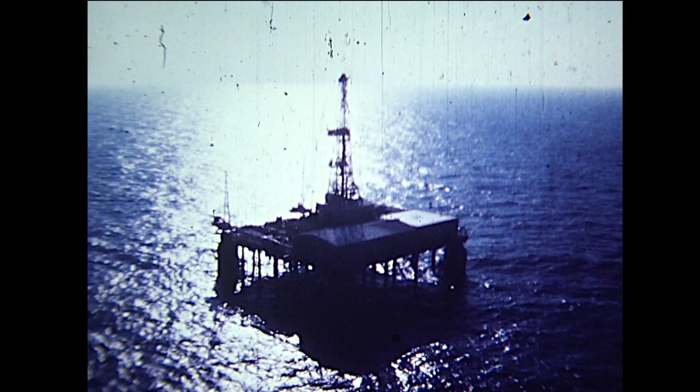As Union Oil began to acquire offshore leases in deeper waters, the question arose, how will we produce them? One of the answers was with subsea completions, Christmas trees on the ocean floor. But Union didn't have a subsea completion anywhere in the world, so management decided before venturing into deep waters, deep water meaning below the effective working depth of divers, to install a deep water system in an existing field. That way, Union could develop the needed expertise and define the production characteristics of such wells.

The Gulf of Mexico was selected for installation because of Union's vast offshore drilling and production experience there. During the summer of 1974, a state-of-the-art study was conducted of the systems then available. The study showed there were 5 manufacturers with functional systems. There were 2 types of subsea trees available, wet and dry. The wet tree is exposed to the marine environment. The dry is enclosed in a 1-atmosphere air environment chamber, which permits access by workers in shirt sleeves. All 5 manufacturers submitted proposals.

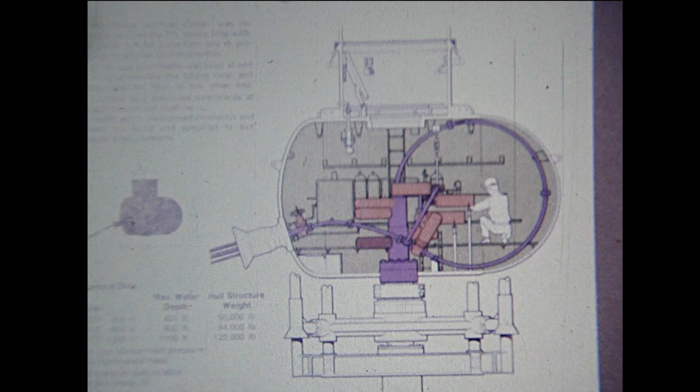The Lockheed Petroleum Services dry system, designed for use in up to 800 feet of water and 1,200 feet with slight modifications, was accepted because it had the best method of connecting flow lines to the well. The connection of horizontal flow lines to the well on the ocean floor in other systems is very difficult without the help of divers. The Lockheed method doesn't require divers for flow line connections.

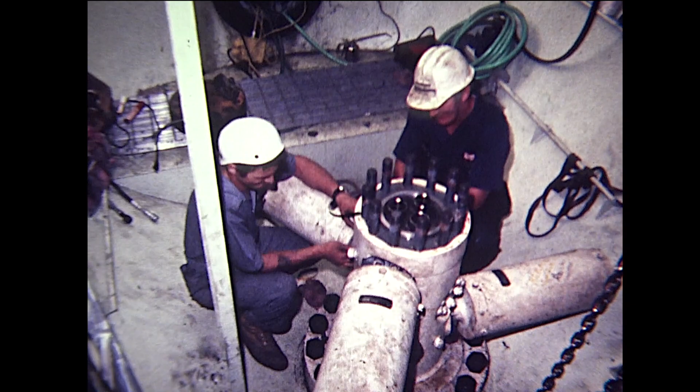Other advantages of the dry system are that vendors can work on their own equipment as they would on land or a production platform, that it protects the electrical and hydraulic equipment from the sea, and that it provides more space to reduce equipment congestion. The main disadvantage is a dependency on a support system for access to the subsea wellhead cellar.

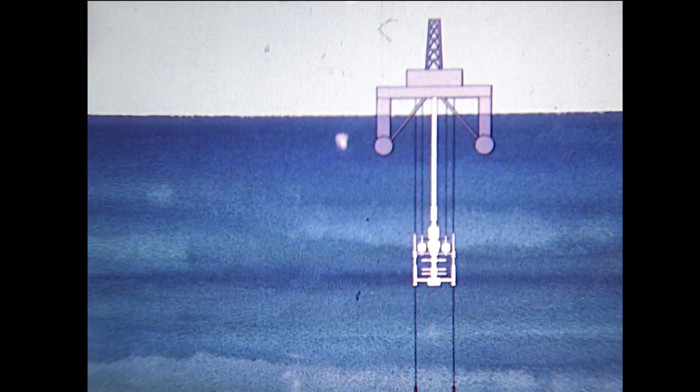Here's how the system works. A floating drilling rig drills a well in the usual manner, with the blowout preventer stack attached to a housing on the ocean floor. Tubing is run and hung in the underwater housing. The blowout preventers are then pulled. The wellhead cellar is then run and attaches to the same housing as the blowout preventers. The guidelines are removed from the guide base and the drilling rig leaves.

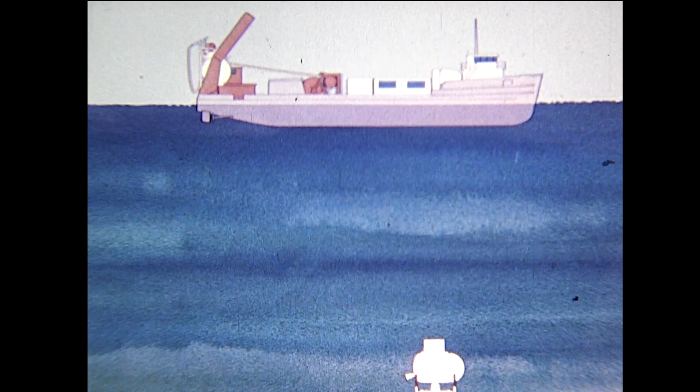The Lockheed vessel then comes to the location and anchors 150 to 200 feet from the wellhead cellar. A recall buoy is activated by a pinger and floats to the surface. A downhaul cable is brought up from the wellhead cellar by the buoy. The cable is attached to a downhaul winch in the skirt of the service capsule. The winch pulls the service capsule down to the wellhead cellar. The service capsule must be winched down because it is buoyant.

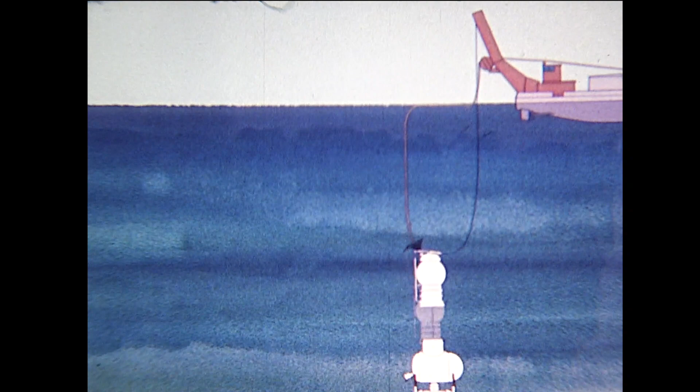When it reaches the wellhead cellar, it mates with the teacup portion of the cellar. An umbilical hose supplies air and electrical power and communications to the occupants inside the service capsule. The water is pumped out of the teacup and the skirt portion of the service capsule and is replaced with air at a pressure of 1 atmosphere. The pressure differential keeps the service capsule attached to the wellhead cellar. Entry is then made into the cellar.

The buoy is released from the bullnose port, floats to the surface, pulling a line, which is then attached to the flow lines on a reel pipe barge. Using a linear puller, the flow lines are hauled into the bullnose port and secured. The reel pipe barge then lays the flow line to a production facility while the personnel install the Christmas tree and control system inside the wellhead cellar.

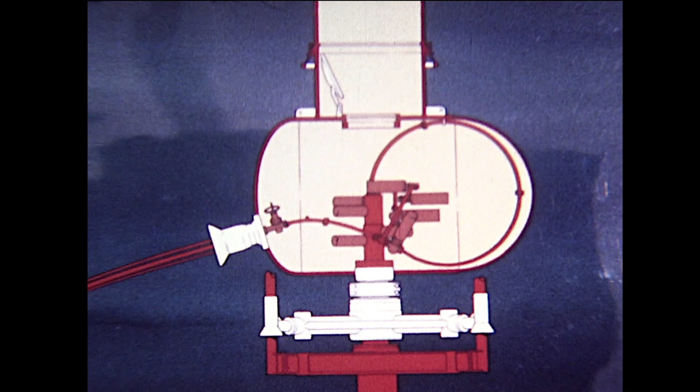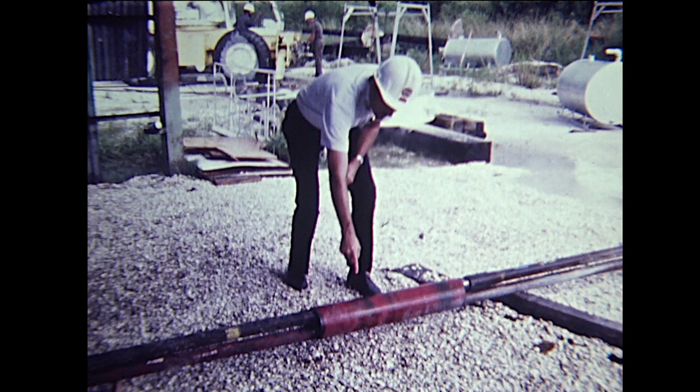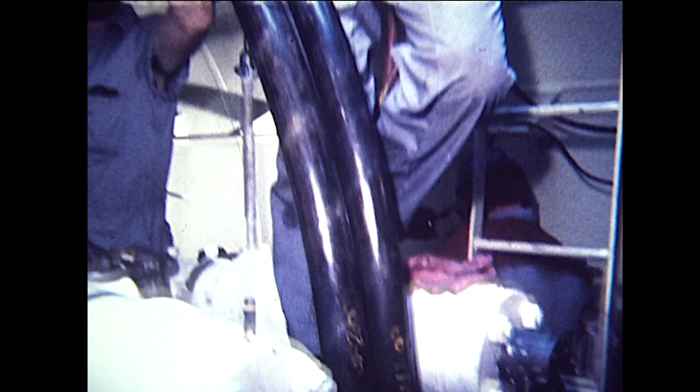Since Union needed through flow line or TFL capability, a horizontal wellhead cellar enclosing both the tree and the TFL tubing loops was ordered. Through flow line pump down tools are needed because ordinary wireline work can't be carried out on subsea wells. Instead, 2 flow lines and 2 tubing strings are run in parallel and are connected at the packer by an H-member. One tubing string, the production string, has a standing valve in the no-go nipple below the packer. The other string, the service string, has a plug in the no-go nipple. These tools can be pumped through a 5-foot radius bend, the TFL loop.

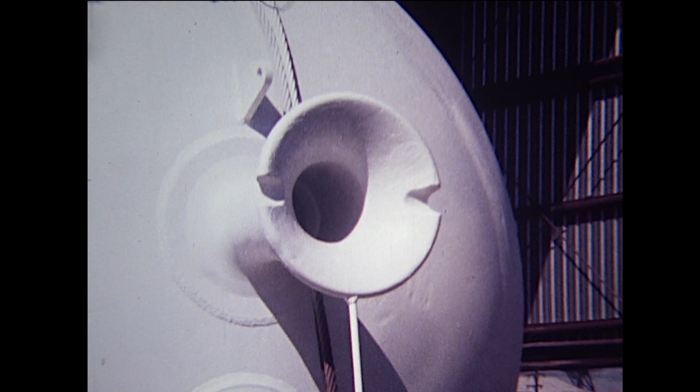The horizontal wellhead cellar could be ordered with the capability of operating at depths of 400, 800, or 1,200 feet. Since at the time the order was placed, it was not certain that this first system would be installed in 200 feet of water at Ship Shoal 269, an 800-foot cellar was ordered. It was felt that this would be sufficient for any location Union would want to install it. An extra 10-inch bullnose port was added above the standard 15-inch port for possible future installation of additional control lines, if they were needed to modify the control system.

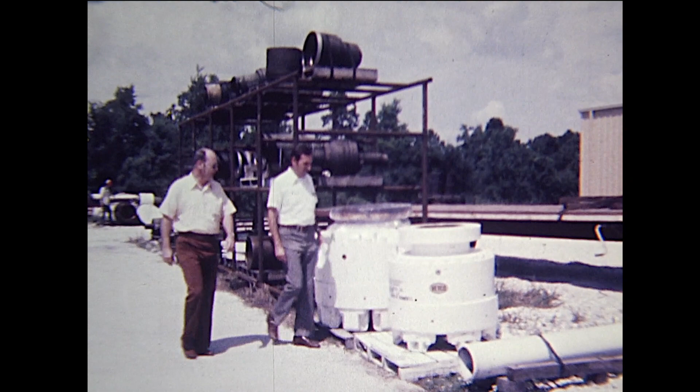The Christmas tree was a 2-inch, 5,000-pound working pressure WKM triple with hydraulically operated fail-close valves. Both upper and lower valves were hydraulically operated, but the upper annulus valve was attached externally to the tree. A 16 3/4-inch, 5,000 psi working pressure Vetco H4 connector was ordered for the bottom connection of the system to match the system aboard the drilling rig Blue Water 2.

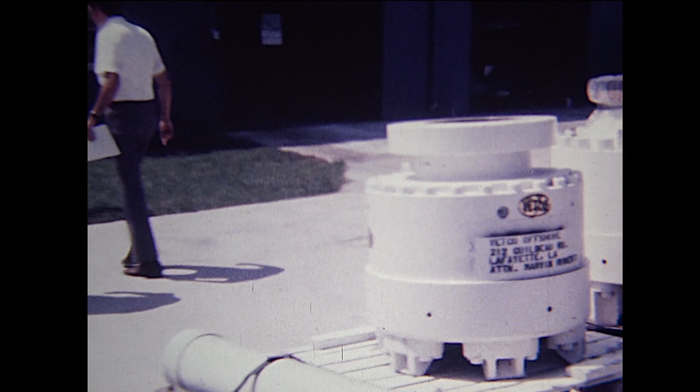A 16 3/4-inch Vetco SG1 wellhead system was also ordered, providing for 30-inch, 20-inch, 13 3/8-inch, and 9 5/8-inch casing and 2 strings of 2 3/8-inch tubing. This included a hydraulic set triple tubing hanger. The safety valves chosen were Hydril's tubing retrievable well guard 2s, since a TFL retrievable valve could be installed inside the standard tubing retrievable valve if needed. The TFL valve would also be surface controlled.

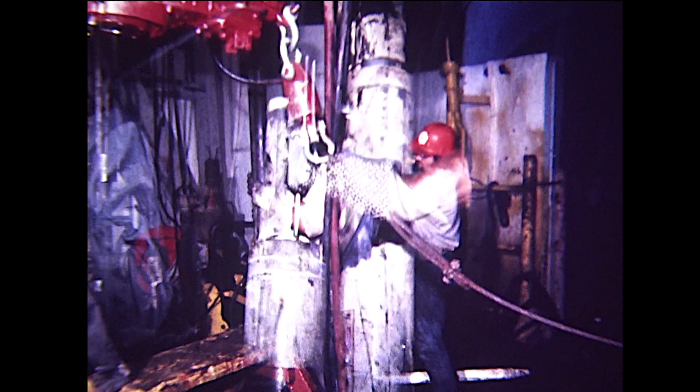Vetco designed a special test block to isolate the control lines, permitting this well to become the first subsea well using surface control safety valves. A multiplex electro-hydraulic system was ordered from Koomey, and an electrical interface system compatible with Union's electronic supervisory system was ordered from Sizecor. 4,000 feet of double-armored subsea combination power and control cable was ordered from Vector Cable Company.

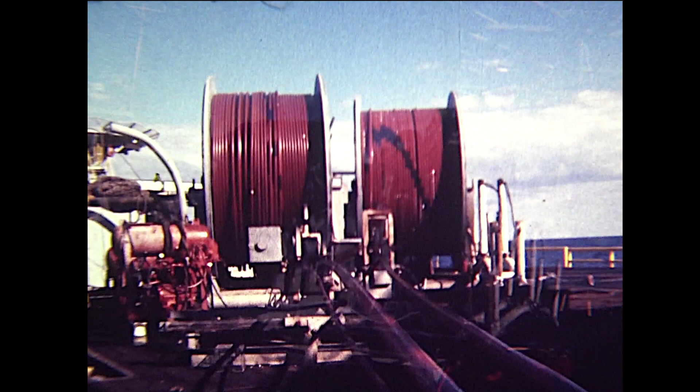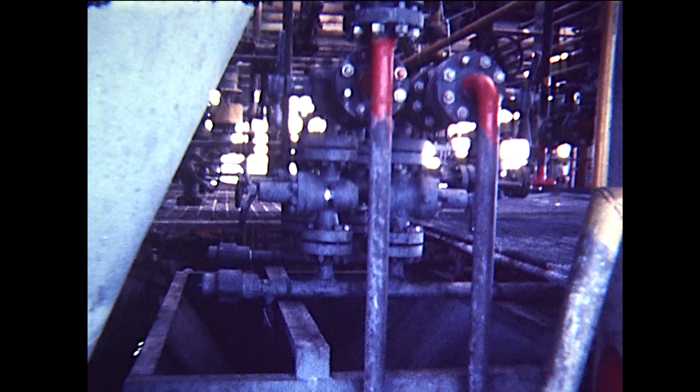An order was placed with Santa Fe Construction to spool 10,000 feet of 2-inch flow line on 2 reels of 5,000 feet. 5,000 feet of 1-inch hydraulic control line was also ordered. A TFL manifold that would serve as a lubricator for installation of TFL tools and a platform Christmas tree were designed and fabricated locally. A Halliburton T10 pump was ordered from Otis to provide a TFL pump. After all these items were ordered, a dry land test site was built. Before the system was installed offshore, it was fully test assembled onshore.

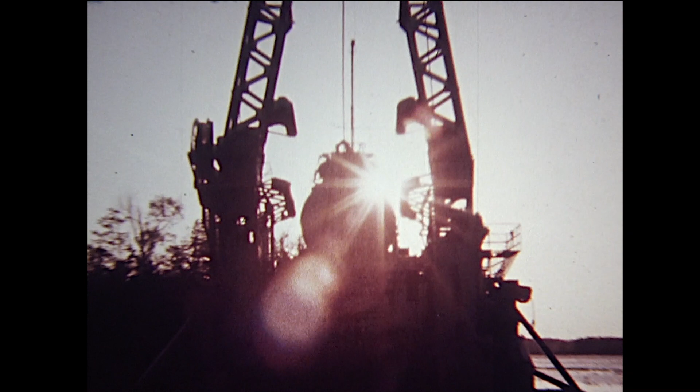A test stand was built at the dry land test site to simulate the guide base that is used on the ocean floor while drilling the well. The stand was built 5 feet above ground level, since the guide base is normally 5 feet above the mud line. A 16 3/4-inch Vetco H4 connector was the top connection. After the test stand was completed, the wellhead cellar was installed on top of the stand with cranes. The wellhead cellar at this point was a shell. It was fitted with all equipment and completely assembled. The bullnose was installed and the flow lines connected, and testing of the system began.

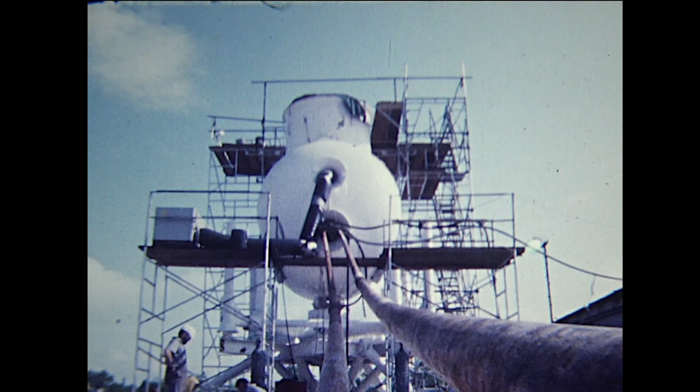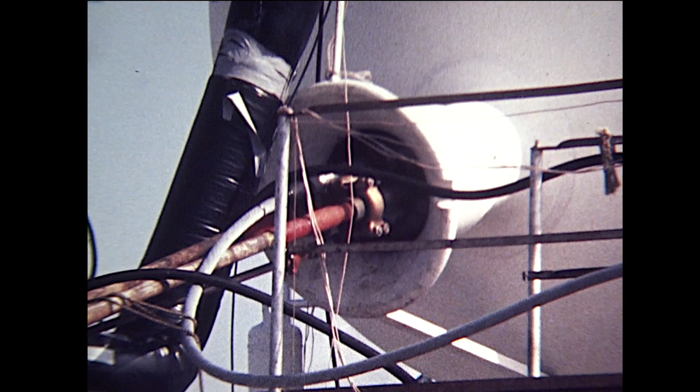The facilities which would go on the surface platform were installed in a building nearby. This included the TFL pump-down equipment and the necessary control systems. Between this building and the test stand, 2 3/8-inch flow lines were laid in a 1,200-foot loop to simulate the operational flow lines. An electrical cable and hydraulic line were also run between the simulated platform area and the wellhead cellar on top of the test stand.

Since the test stand was not over an actual well, tubing strings could not be run in the ground. A 5-foot radius loop was installed under the test stand, which allowed tubing strings to be laid on the ground. The 2 tubing strings contained the downhole safety valves, the tubing position nipples, and the H-member with the standing valve and the plug in the bottom. The first test phase called for operation of all components as they would perform in subsea use. The second phase dealt with TFL testing, and once both were completed, a training session for offshore operations personnel was undertaken.

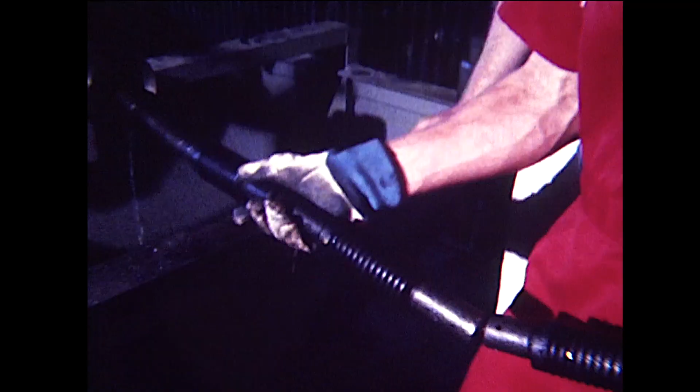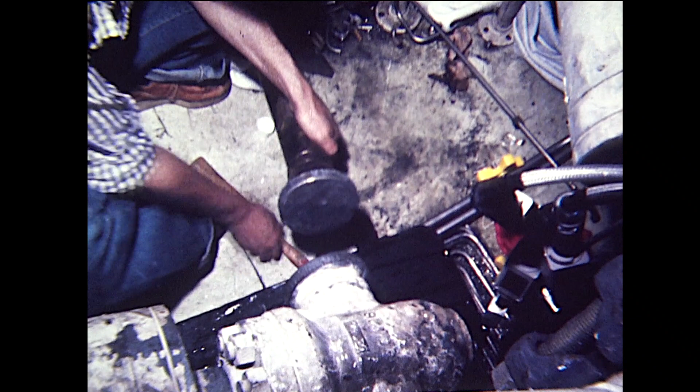After the training program was completed, the wellhead cellar was disassembled and prepared for shipment offshore. Then, since the wellhead cellar would be exactly as the personnel would find it on the floor of the ocean, reassembly was performed simulating underwater conditions as closely as possible. This included a flow line pull-in. All reassembly filming was also done at this time so as not to interfere with actual operational use. The system was given one final retest and prepared for shipment offshore.

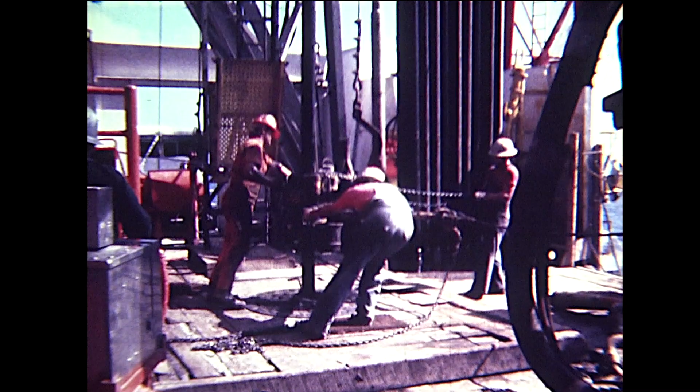The well being prepared for Union's first test of the subsea system wasn't spudded in until the wellhead cellar was ready for installation, though it could just as well have been drilled and left until the wellhead cellar was to be installed. With this system, a well may be temporarily abandoned with an underwater housing attached, then be completed at a later date. The Blue Water 2, a semi-submersible under contract with Union, was moved to Ship Shoal Block 269 to drill the number 5 well in 200 feet of water.

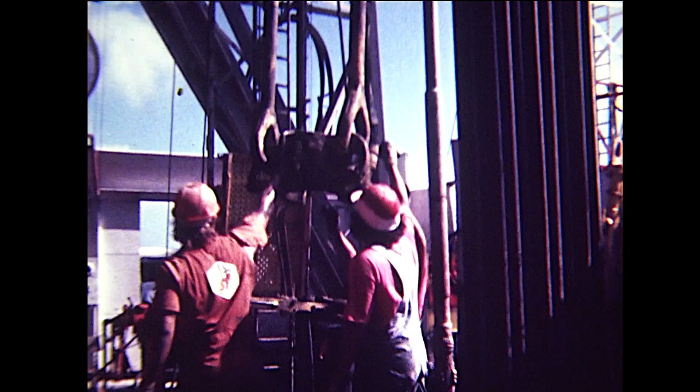The site was selected for the subsea completion because a production platform was nearby, a platform with wells of known production characteristics. This well differed from the ordinary only in the use of a special guide base, with both 7-foot and 10-foot radius guide posts. A 7-foot guide frame was on the blowout preventers, a 10-foot guide frame was on the wellhead cellar. During drilling, the guide lines were connected to the 7-foot guide posts.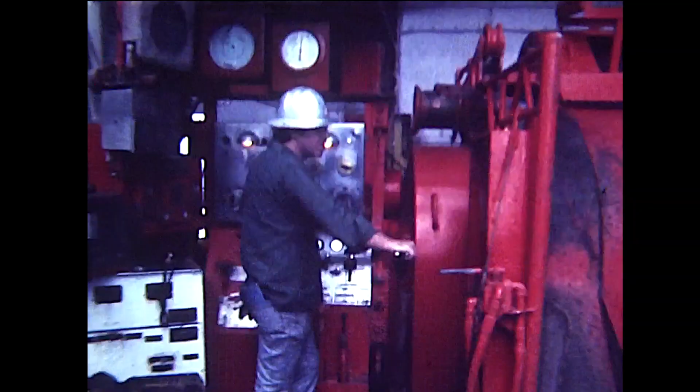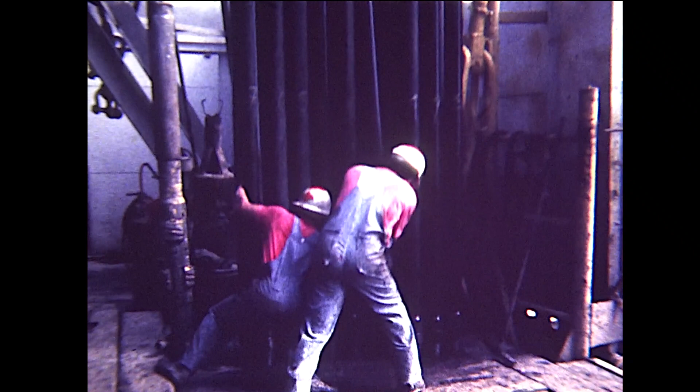30-inch pipe was jetted in with the guide base. Then the 20-inch casing was cemented with the 16 3/4 Vetco H4 housing. The blowout preventers were then attached to the H4 mandrel. 13 3/8 and 9 5/8 inch casing were run and cemented, as is normally done. The 9 5/8 inch casing is the production string.

The first step in the completion of the well was to gravel pack the production zone inside the casing. This production zone had no history of producing sand in the earlier platform completions, but it was decided to gravel pack as an extra precaution. After the well was gravel packed, it was drill stem tested following an acid job to remove plugging agents in the gravel pack.

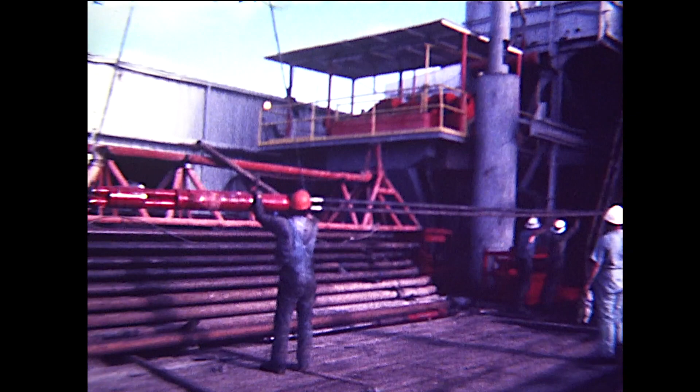The tubing was run after it was determined that the well would produce sand-free. 2 strings of 2 3/8 inch 4.6 pound N80 CS hydro tubing were run simultaneously with a dual hydraulic packer with an H-member above.

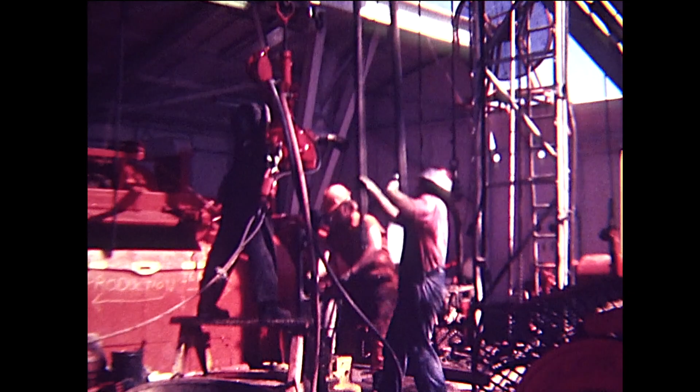Below the packer were Q-nipples with a plug in the service string Q-nipple. The production Q-nipple was empty, and a ball trip sub was located below it to set the packer. 30 feet above the packer, 2 Otis Select 10 Position 1 nipples were located. A Position 2 nipple was located at 2,500 feet. The Hydril WellGuard 2 safety valves were installed in each string about 150 feet below the mud line.

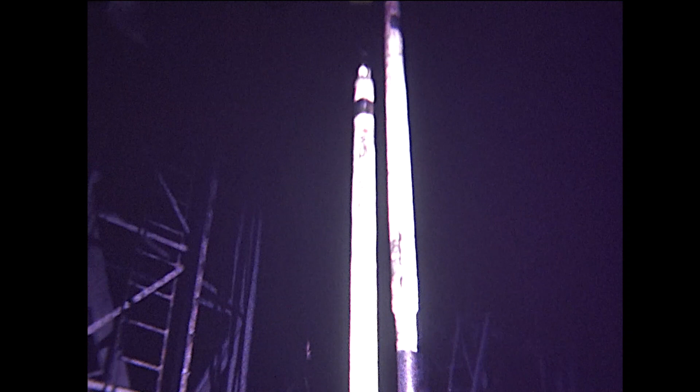The Vetco tubing hanger was attached to the tubing strings, and the control lines for the ball valves were attached to the bottom of the hanger. Then the tubing hanger running tool was installed, and the hanger was run on a special completion riser built by Vetco.

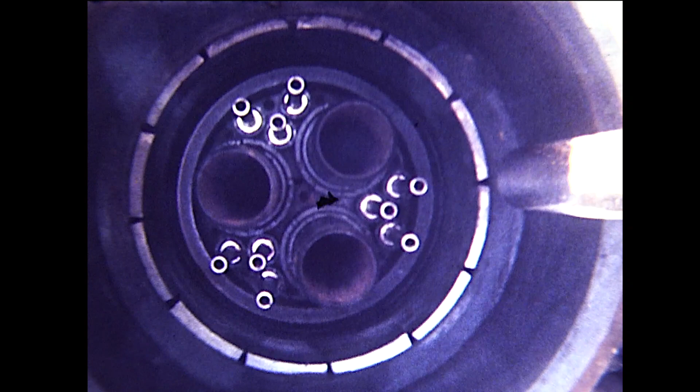The completion riser had 3 2 1/16 inch bores and 9 1/4 inch bores housed inside an 8 5/8 OD. 2 of the 2 1/16 bores connected to the production and service tubing strings. The other large bore was the vertical annulus access. 4 of the 1/4 inch lines were used for operation of the downhole subsurface ball valves. The other 5 were used to operate the hydraulic running tool that set the tubing hanger.

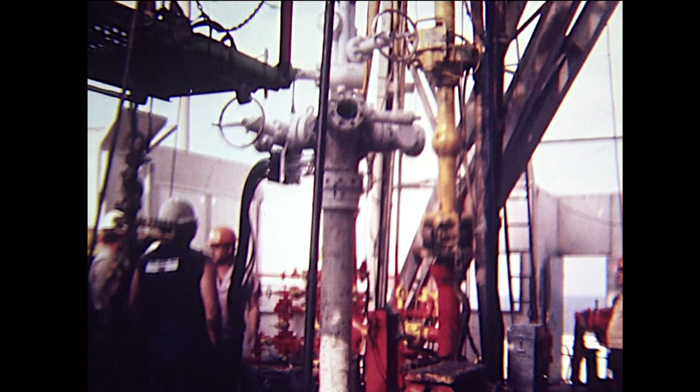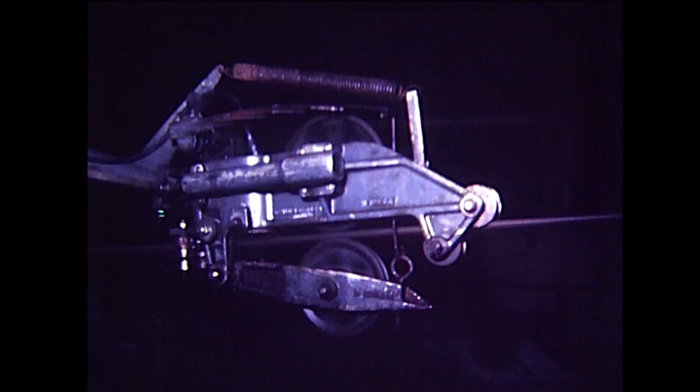After the tubing hanger was landed, a terminal head was installed on top of the completion riser. A ball was then dropped and the hydraulic packer was set. A gamma ray collar log was then run to determine the exact depth of the packer no-go and of the Q-nipples with relation to the production zones. This exact depth correlation is needed for future TFL perforating.

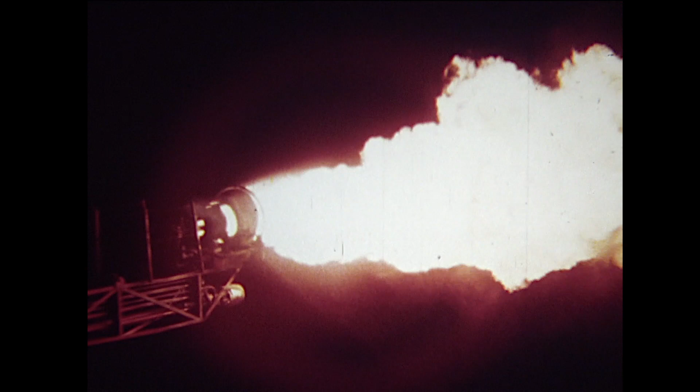Then a standing valve was installed in the production string Q-nipple. Diesel was displaced down the production string through the H-member and up the service string. The well was then flow tested. After the flow test was completed, the well was killed with salt water. The ball valves were closed. Plugs were then set in the tubing hanger by wire line.

The tubing hanger running tool was released and retrieved on the completion riser, and a special tubing hanger protector was run on the completion riser to isolate the tubing hanger from any pressure above. After the tubing hanger protector was installed, the blowout preventers were disconnected from the H4 mandrel on top of the 16 3/4-inch housing and pulled to the surface.

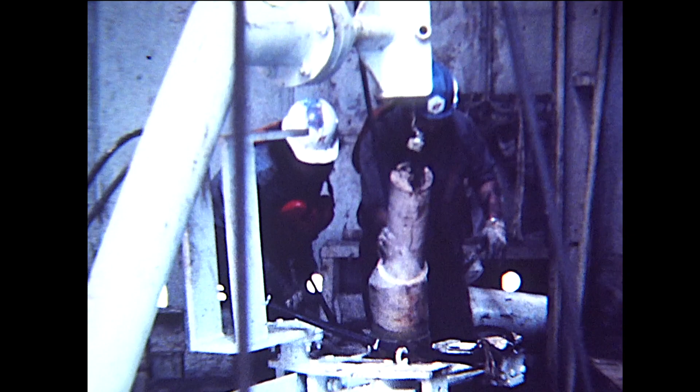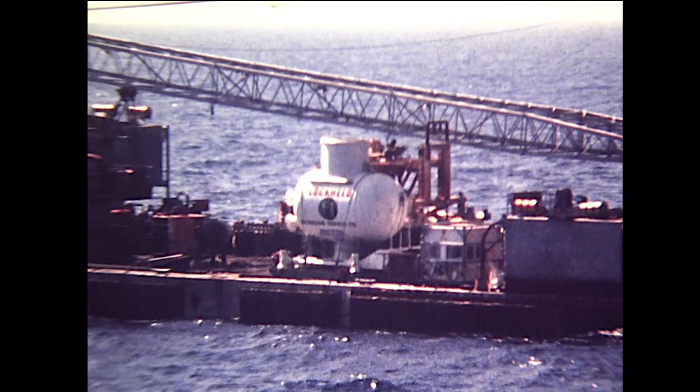The guidelines were then removed from the 7-foot radius guide posts and reestablished on the 10-foot radius guide posts. This was done with a guideline replacement tool designed by Vetco specifically for this project. While this was being done, the wellhead cellar was brought to the drilling location by the derrick barge Tonkawa. The cellar had to be keel-hauled because it was too big to go through the spider beams.

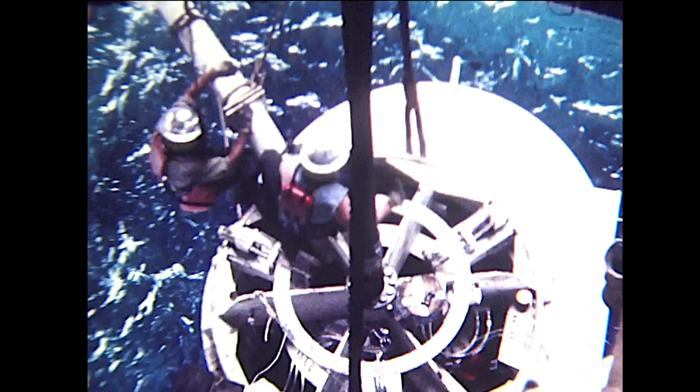As this model demonstrates, the Tonkawa lowered the wellhead cellar into the water. The Blue Water 2 pulled the wellhead cellar beneath the rig as the Tonkawa let off. Then the rig pulled the wellhead cellar up to the spider deck of the drilling rig. Once the wellhead cellar was firmly attached to the rotary beams, the Lockheed wellhead cellar running tool was attached to the cellar. The wellhead cellar was run on drill pipe with a hydraulic hose bundle attached to the drill pipe while it was being run.

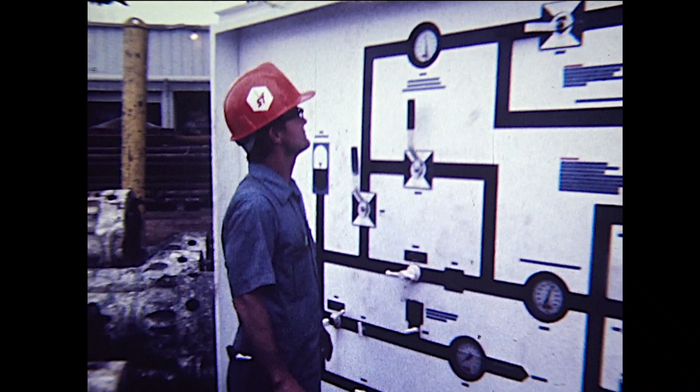The cellar was then attached to the H4 mandrel on the 16 3/4 housing as the blowout preventers had previously been attached. The connector on the bottom of the wellhead cellar was welded to a spool, on top of which was a blind flange which prevented seawater from entering the cellar. After the cellar was attached to the housing, the connection was tested to a pressure of 5,000 pounds per square inch. The tubing hanger test protector prevented this pressure from reaching the tubing hanger, and the blind flange prevented it from entering the wellhead cellar.

After this test was completed, the running tool was released and retrieved. The guidelines were then removed remotely from the 10-foot radius post tops, and the rig was released to go to its next location.

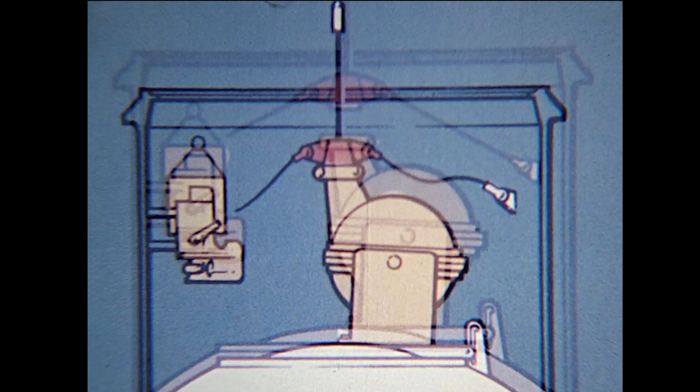After the drilling rig departed, the Lockheed boat Coastal Cruiser arrived at the location, anchoring in a 4-point moor about 200 feet from the wellhead cellar. An acoustical device activated a pinger which fired an explosive bolt, releasing the recall buoy attached to the wellhead cellar. The buoy floated to the surface, unreeling a nylon line attached to a cable spooled in the teacup area. This cable is pulled to the surface and hauled completely out of the spool and into a 3-part bridle centered in the teacup.

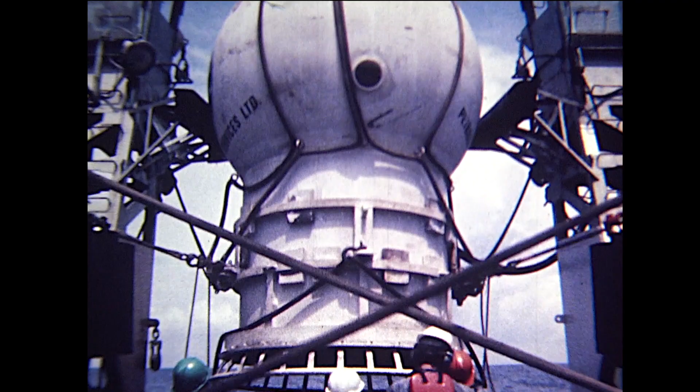On the stern of the boat, the cable is attached to a winch located in the wet skirt area of the service capsule. The boat then launches the service capsule into the water, and the capsule pulls itself down the line to the wellhead cellar. It must power itself down because it has 2,000 pounds of positive buoyancy. If the cable breaks, the service capsule will pop back to the surface.

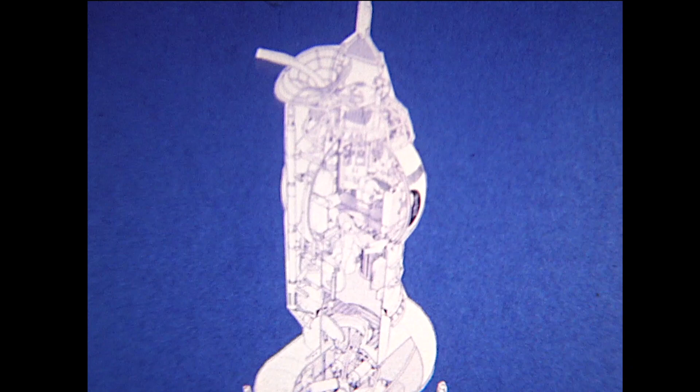Once the capsule reaches the wellhead cellar, a rubber gasket seals the mating surface at which the capsule and cellar join. The water is then pumped from the chamber formed by the teacup and the wet skirt. As the water is being pumped, the pressure in the chamber drops from hydrostatic to atmospheric. The differential hydraulic pressure over this area keeps the service capsule firmly attached to the wellhead cellar.

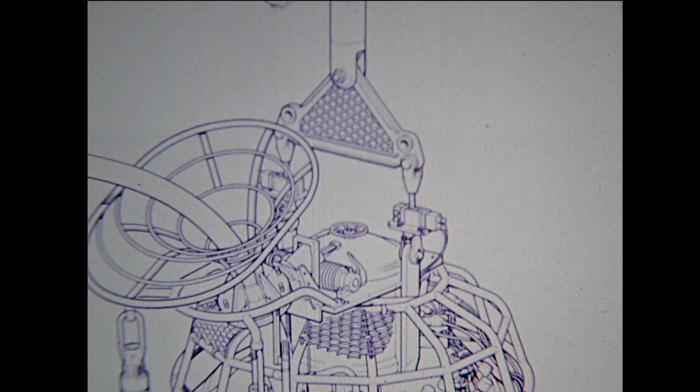After the water is pumped out, the personnel in the service capsule can enter the teacup area of the wellhead cellar. The pressure inside the wellhead cellar itself is immediately checked, as are indications of any hydrocarbons. If hydrocarbons are detected, or if the cellar has been inerted with nitrogen, the wellhead cellar is displaced with fresh air. Only after the cellar has good quality air is the hatch to the wellhead cellar opened and entry made into it. Only 3 of the 4 crewmen enter the cellar. The 4th man remains in the service capsule, monitoring the life support readings and maintaining constant communications with the control room on the Coastal Cruiser.

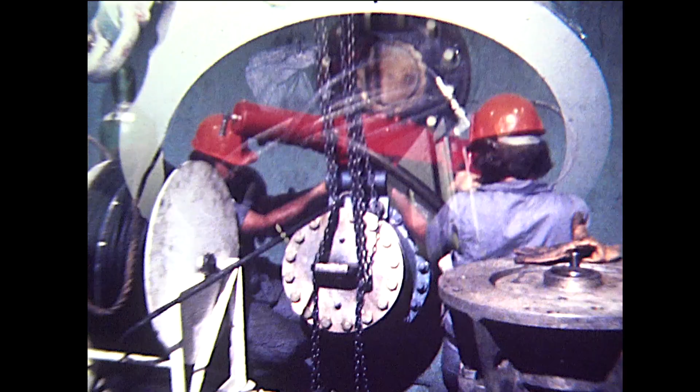After entry into the cellar is made, the crew begins to install the flow line pull-in equipment. The bullnose port has a special wafer with lockdown dogs attached to the flange on the inside of the wellhead cellar. Attached to this wafer is a large ball valve, which has a blind flange attached to it. After checking to make sure that ambient sea pressure is not leaked into the bullnose port, the blind flange is removed from the ball valve. A buoy canister containing an inflatable buoy, a hydro line stripper, a Bowen hydraulic line lubricator pack-off, and a linear puller are installed.

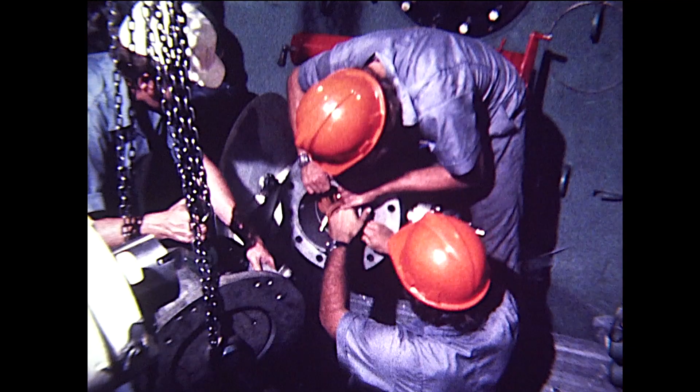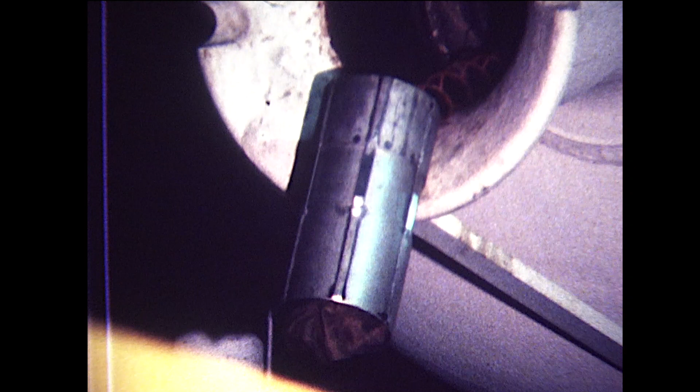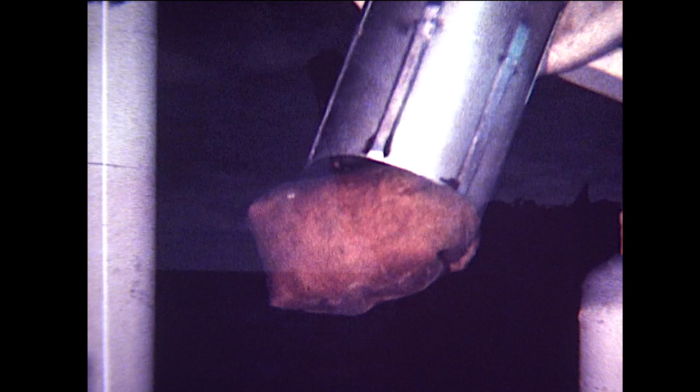A line is attached to the inflatable buoy, the ball valve is opened, and nitrogen is used to blow off an internal plug in the bullnose. The inflatable buoy is then pushed out of the bullnose and inflated with nitrogen through a small hose attached to the inside of the buoy canister. The hose disconnects automatically when the buoy begins to rise to the surface, and a check valve keeps the nitrogen from escaping. As the buoy floats to the surface, the line is fed through the Bowen pack-off and the hydro line stripper.

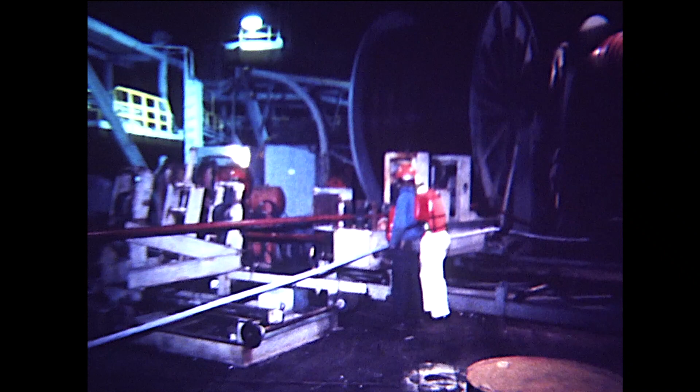At the surface, the buoy is brought to a lay barge and attached to the bullnose, to which the flow lines, control lines, and electrical cable are in turn attached. After it's securely fastened, the crew inside the wellhead cellar begins to haul in the line with a linear puller, while the lay barge reels out the pipe to the wellhead cellar. On this installation, 550 feet of pipe was pulled from the lay barge to the bullnose port in only 2 hours and 11 minutes.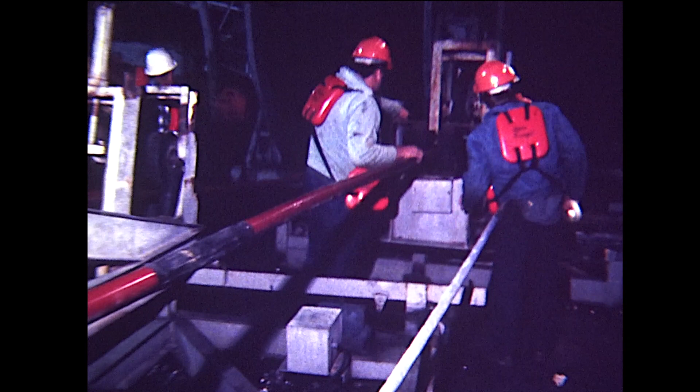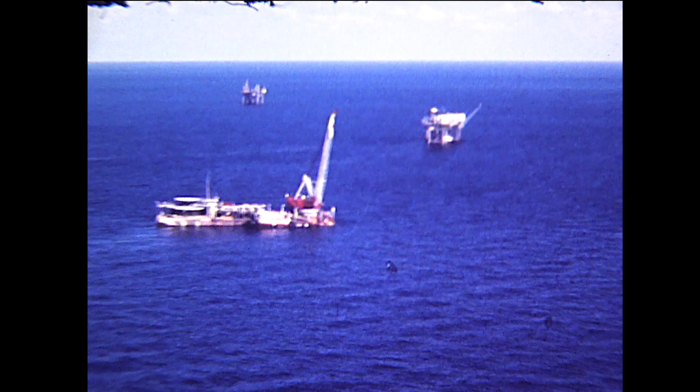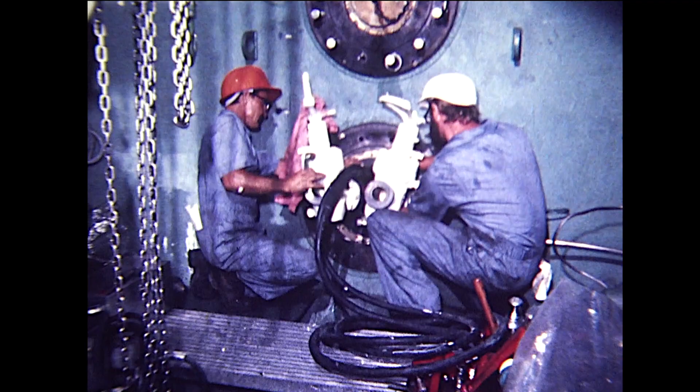After the bullnose is secured and locked in the bullnose port, the lay barge lays the line to the production facility. The crew then removes all the pulling equipment and installs hull valves on the bullnose itself. A lubricator is then attached to the hull valve, and plugs are removed from inside the bullnose. These plugs would prevent water from entering the wellhead cellar if a leak in the flow line developed, after the pull-in equipment is removed and before the hull valves are installed. After these plugs are removed, the crew turns its attention to the tree installation.

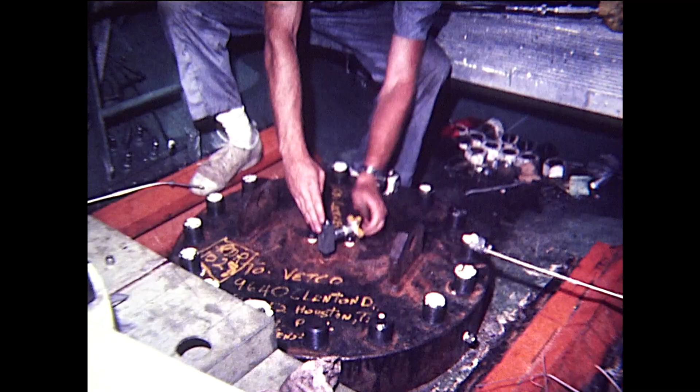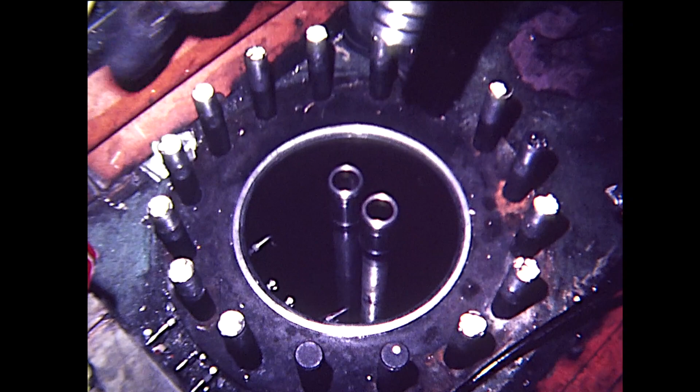The blind flange on the bottom of the wellhead cellar is removed, as is the special tubing hanger protector, and a special test plug is installed over the tubing hanger to take the check valves out of service in the subsurface safety valve lines. The control lines and the subsurface safety valve lines are then connected. The tubing seals are installed in the two tubing strings and the vertical annulus.

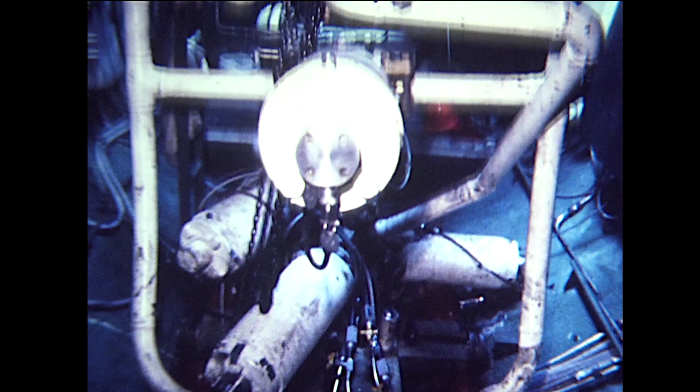The tree is then bolted down and a wireline lubricator is attached to the tree to pull the plugs that were installed when the tubing hanger was run down the drilling rig. This is exactly the same procedure which would be followed on any other well. That is, the back pressure valve is installed in the tubing hanger, the blowout preventers are removed, the tree is installed, and the back pressure valve is then pulled.

The TFL loops are then installed and connected to the hull valves. The control system is connected and the system is tested. All of this is done in a 1-atmosphere shirt-sleeve environment, though the well is many feet below the surface of the sea. On the last dive, the crew installs a new recall buoy and downhaul cable package.

And after the wellhead cellar hatch is securely sealed behind them, its air is displaced with nitrogen to create an inert, explosion-proof, non-corrosive environment in the cellar. When the service capsule is back on the surface, the old downhaul cable is retrieved and the boat is ready to leave.

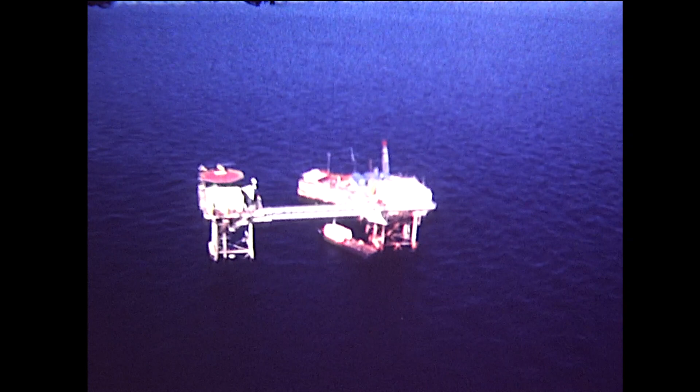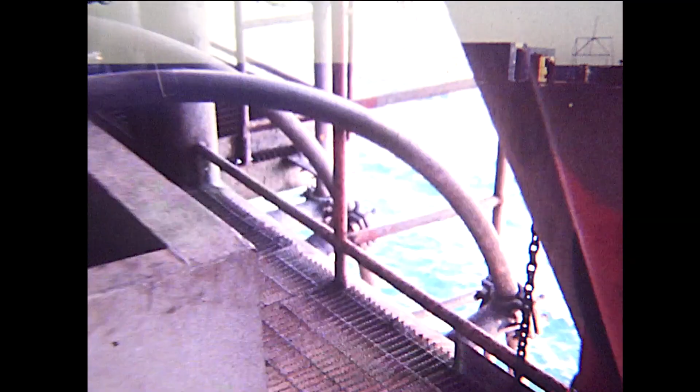While the coastal cruiser was working night and day, the reel pipe barge laid the flow lines and the control lines, including the electrical cable, to the production platform. The lines were connected in the conventional manner, using risers. A 5-foot radius loop was on the top and bottom of the riser.

The TFL manifold had been installed along with the TFL pump and control system before the well was spudded. On the last dive of the service capsule, the control system was given its final check. Although a very simple hydraulic system could have been used to control this one subsea completion, the decision was made to install a multiplex electro-hydraulic system in order to provide experience with such systems. This is the type of system which would have to be used in fields with numerous subsea completions.

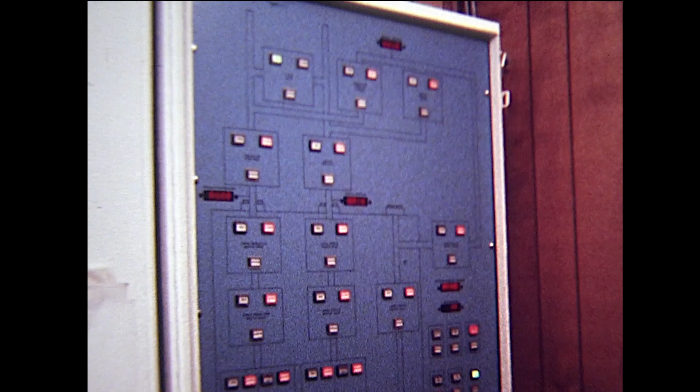A hydraulic override system could also control the well from this panel if the electronics failed. The well can be operated remotely from the district office, the Eugene Island 276 field, or from the platform by use of this annunciation panel. The annunciation panel outlines in lights, switches, and gauges the Christmas tree in the wellhead cellar. Each remotely controlled valve is depicted on the panel.

The two subsurface safety ball valves are indicated here, one for the production side, one for the service side. These 4 valves depict the master valves, both production side and service side. This is the production wing valve. This is the service wing valve. Between the upper master valve and the wing valve, pressure can be read from the flowing tubing string, either the production side or the service side.

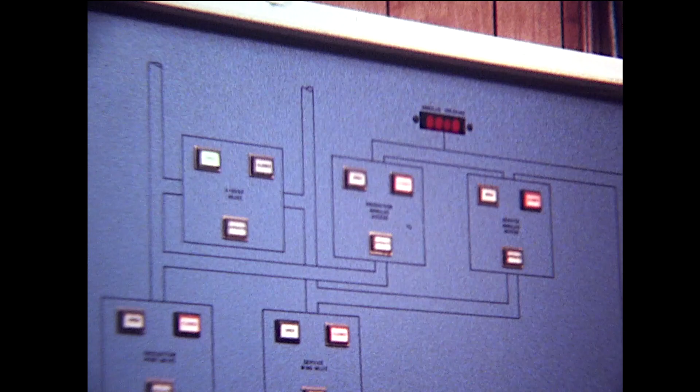This is the only valve that is fail-safe open. If the well shuts in, the crossover valve between the 2 flow lines will open. These 2 valves give access from either flow string, either the production or the service flow string, to the annulus. These 2 valves are the annulus master valves. This allows vertical access into the annulus.

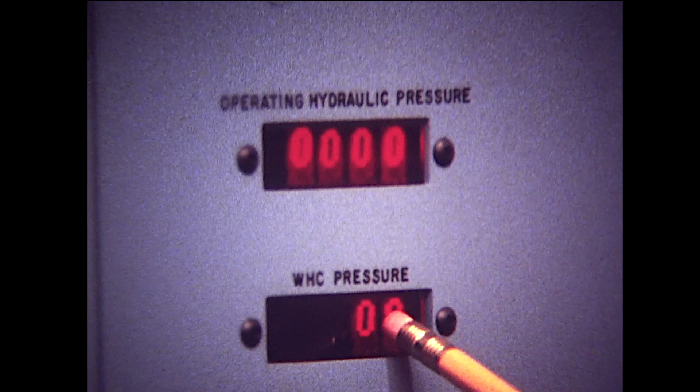The annulus pressure can be read by opening the lower annulus master valve and the upper annulus master valve, which allows annulus pressure to be read at this point. The wellhead cellar pressure can be read in pounds per square inch. There will be approximately 1.5 atmosphere pressure left inside the wellhead cellar, or about 22 to 23 psi.

The operating hydraulic pressure on this gauge tells how the hydraulic system is operating. The reference pressure is downstream of a regulator which maintains constant pressure to balance the hydraulic sequencing valves. These controls operate the valves sequentially. This is a master shut-in switch which shuts in everything, including the master solenoid valves. This switch shuts in the well without closing the master solenoids.

This normally opens the well. This switch opens it from the production mode to the TFL mode. This returns from TFL mode to normal production. These switches open and close the valves in a normal sequence, as the pumper would if he had access to the hand wheels on the valves themselves. This button brings the annunciation panel into service. This button puts it back on the scan from the computer so the well can be operated either from Houma or from Eugene Island 276.

After the systems were thoroughly checked out, the well was put on production on a beautiful Sunday morning in May 1976, 2 years after the initial study was undertaken. Why did Union Oil embark on this project? To be sure that Union will be ready to produce oil and gas profitably when it is found in deep waters. Years from now, when deep water production is routine, the lessons learned at the dryland test site and Ship Shoal Block 269 will have shown the way.